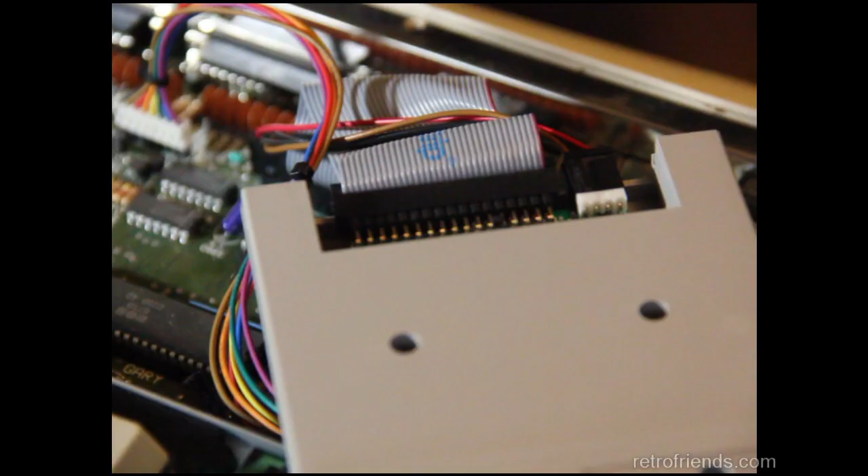Hello. In the first two videos of this series I showed you how to set up a Gotek Floppy Emulator for the Amiga and added some hardware modifications. In this video I will show you how I made a custom Amiga 500 mount that simulates a floppy disk.

Here you can see how it operates. The thumb drive goes into the eject buttonhole, which also ejects the disk. I fitted an OLED screen and navigation buttons into the disk itself.

If you only wanted to see the end product, you can stop this video shortly. The rest of this video is how I designed this end product. Anyone not interested in such things may find the rest of this video boring.

Anyway, I got the idea to do this mount from Thingiverse, a site for freely exchanging 3D printer object files. Let's check that out first, since it's where I started. Okay, so here on Thingiverse we have the original object by Ashes Man. Props to him for coming up with this idea in the first place.

There are a couple of improvements or changes I'm going to make to this design. This is for the 1200. He says it can be adapted for the 500. I basically started from scratch. The only object I downloaded was the disk object, and that was just to look at it, just to see sort of what he did, but I knew I was going to change it. And what I wound up doing is recreating the whole thing from scratch.

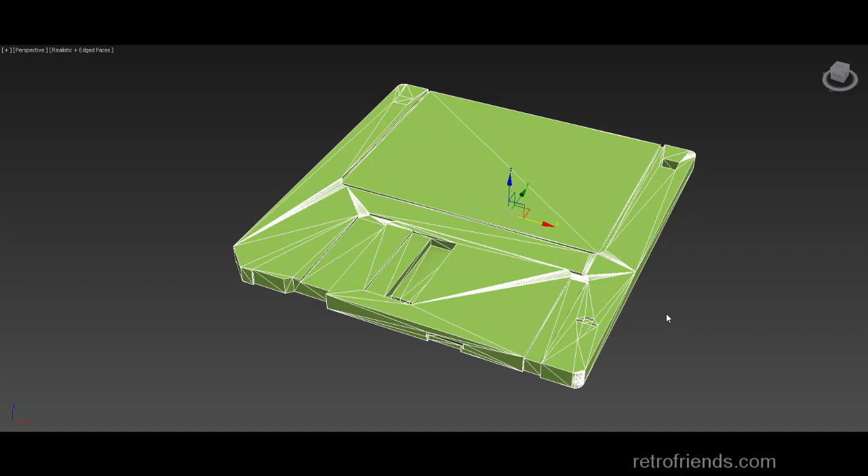Okay, so here we have the original object imported into my 3D program, and a couple of things about the design that I noticed were this part of the disk, the disk door that slides open and closed, and this arrow here. Everything basically from this point out to this point is never visible from the outside because the disk only slides out 2/3 of the way or whatever. So I just didn't see the point of having that in my design.

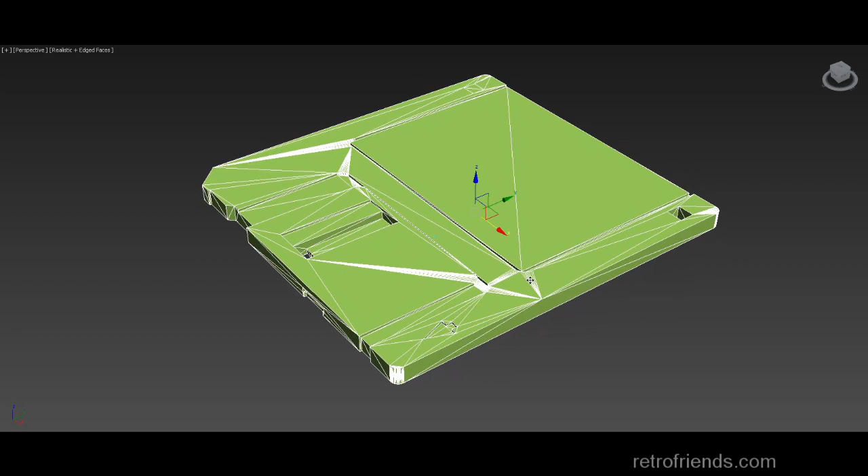Another thing is he created this in order to simulate the larger edges. The edges of the disk here are thicker on an original disk than this center part here where you put the label. It's a slightly recessed or stepped down area. His solution was to create a channel that goes over and around.

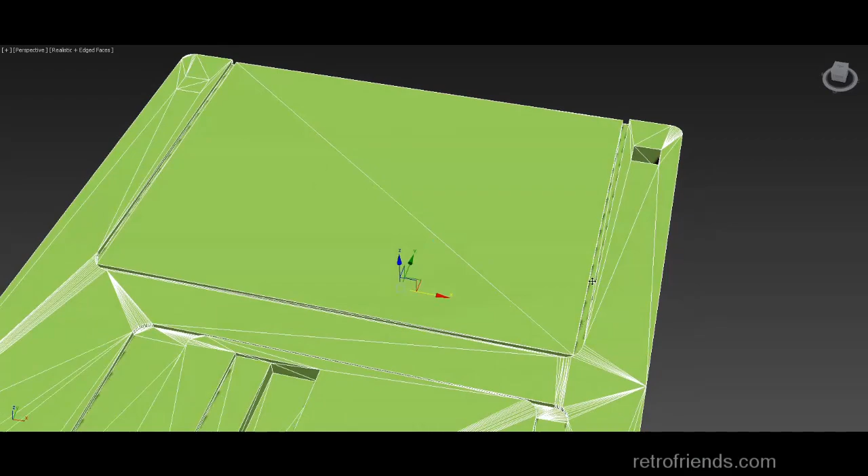His design here doesn't have any openings on the top. He assumes that you're going to print this out and then he has it very, very thin in the areas where you need to cut it out. You can almost punch it out, I guess. But I mean, you do that and you're going to have to finish it off somehow.

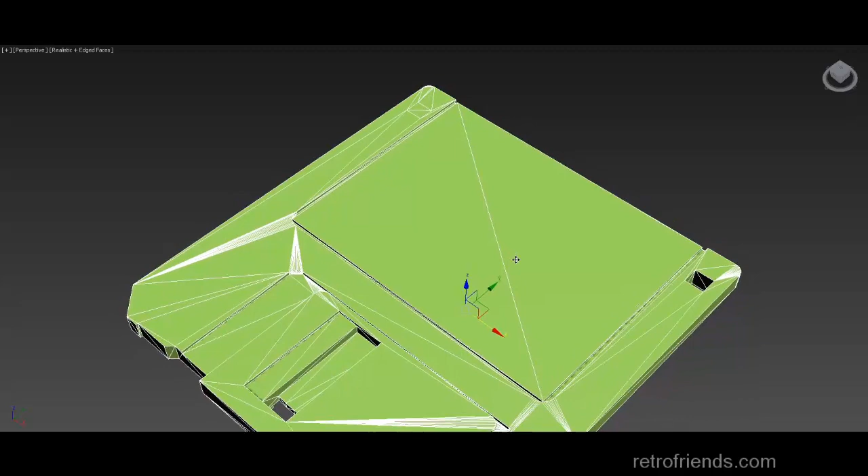So my design, I treat all of this differently. I'm not saying that he's wrong in what he's doing. I just have a different way of doing things. I plan to have a base object, and then this is actually going to be a separate object that I print that I'll simply glue to the top of the other one to create that stepping effect.

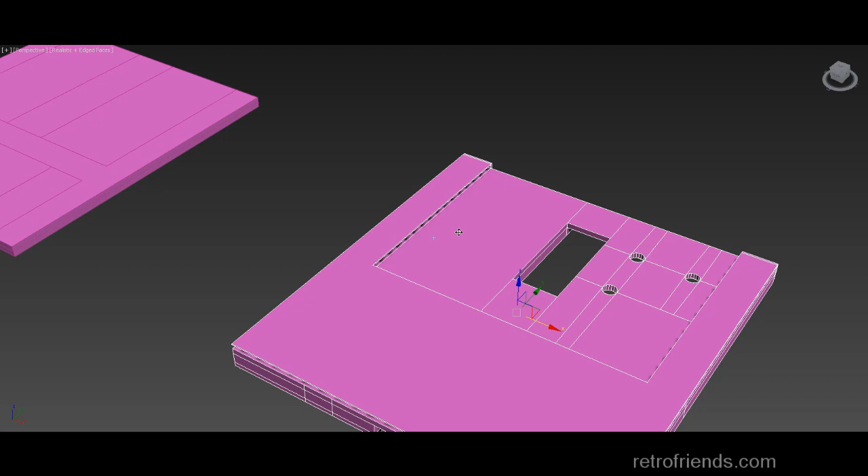Because of the detail that's required underneath, you have to print this upside down in order to get the details right. Yeah, because we're going to have some steps here, and obviously this is all going to be messed up if you don't print it correctly.

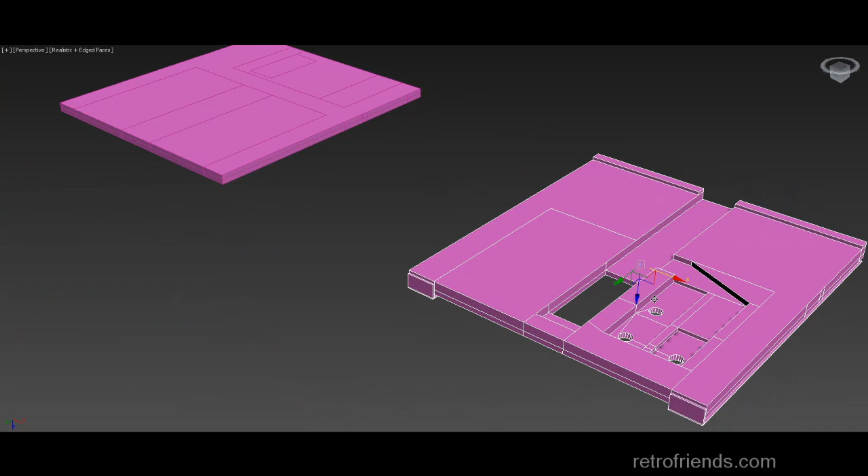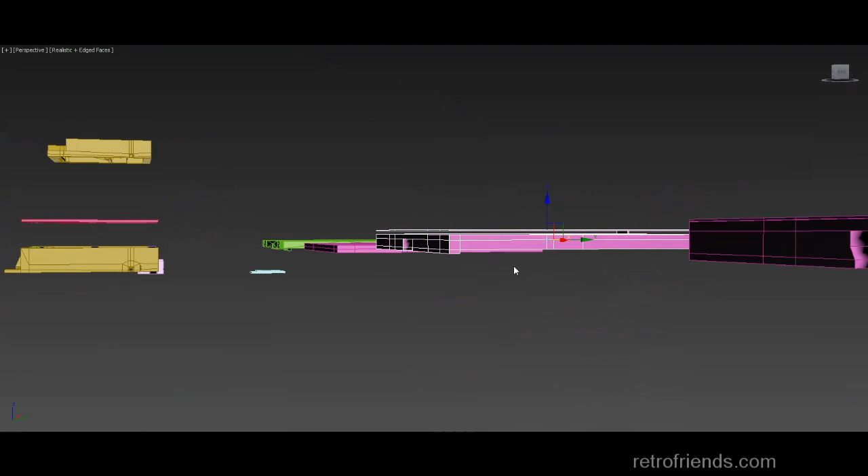So this copies his original design in the fact that he has a channel cut into his object for wiring the buttons, and I guess you would assume that you'd want to glue this stuff in, otherwise I don't see how it would stay. I think in this particular case I was checking out the ability to create this second piece that's on top.

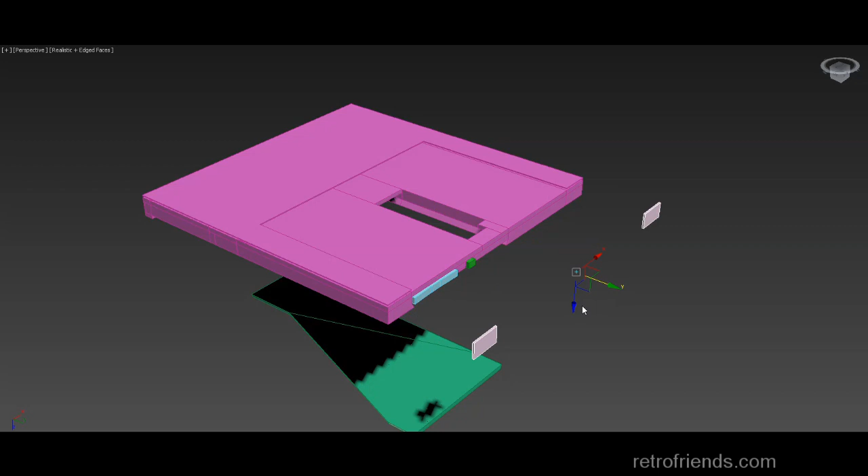So here's my final product. Here's my top piece, and the top piece has two separate pieces that you print, because obviously when you print something like this you can print it upside down, and these will print, except they're not going to come out very well, especially when it's only like a millimeter thick. It's going to come out kind of inaccurate.

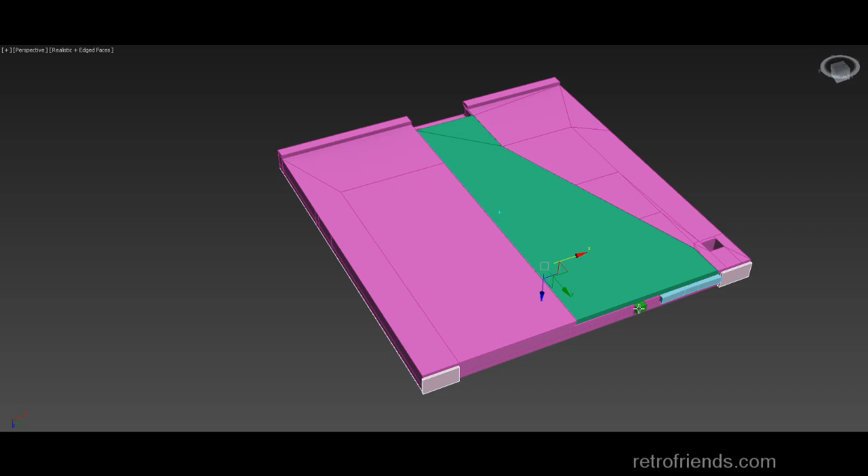You're going to get some oozing and whatnot, and it's just not going to look right. So I print these as two separate objects on the printer face down so that they come out really well. And here's the big change I did. The buttons, I created a rocker switch for scrolling up and down, and the eject button is right next to it. And then the display is kind of in the same place.

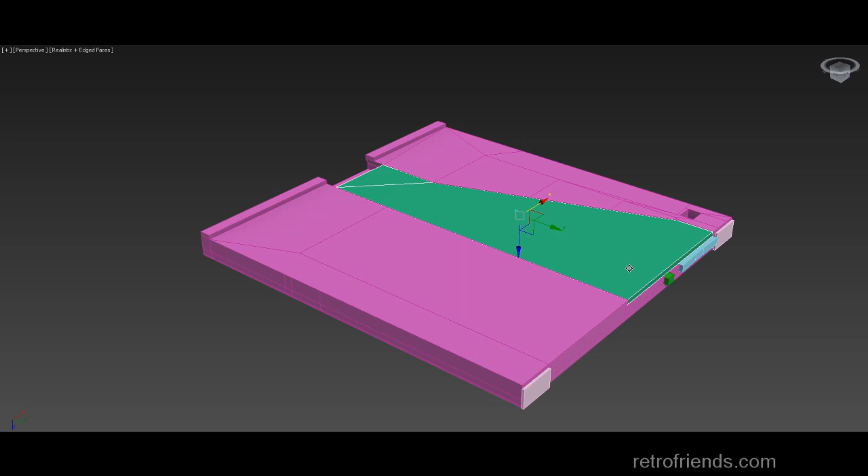So let me just show you how this, plus I have this cover, and this cover worked out extremely well, better than I could have expected. I designed it to perhaps glue in, perhaps screw in, but then I discovered that there's no way I would get usable screws of the right size that would go flush, because this is only a few millimeters thick.

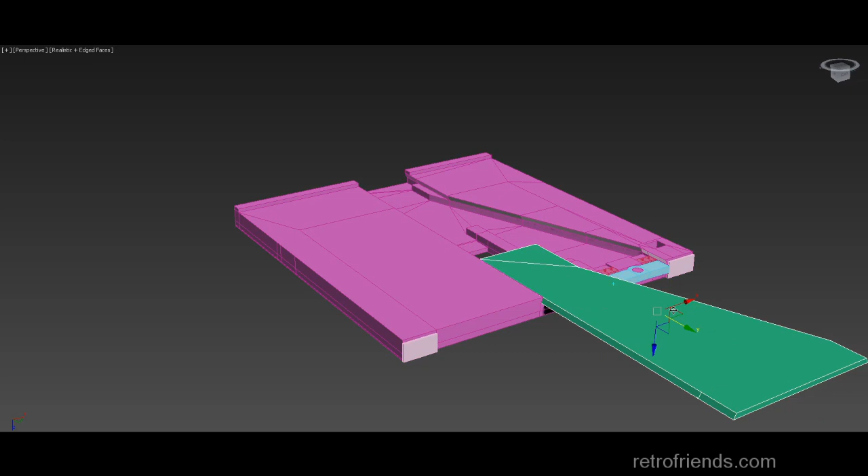So I created an angle on this object and on the main object so that this thing would actually slide in by itself and just sort of lock itself in. And it really worked very well. So this is the way you would print these objects. This one like this and this one like this.

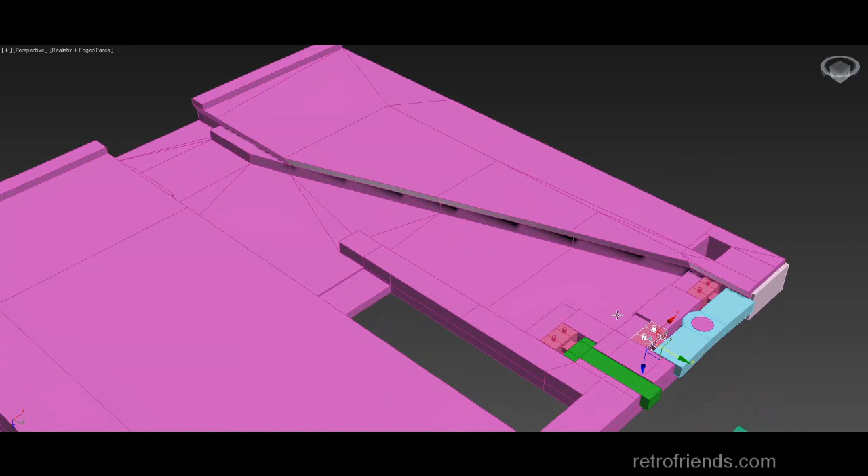And here are some, I modeled some switches, some momentary switches. These are available on Amazon or wherever. They're pretty much the smallest switches you can get. And they're somewhat SMD type. I mean, the contacts on these aren't these posts. They're like right here, and yeah, they're basically SMD type. They're very tiny. So I plan to use tiny wires anyway, and I'm not going to put any strain on them.

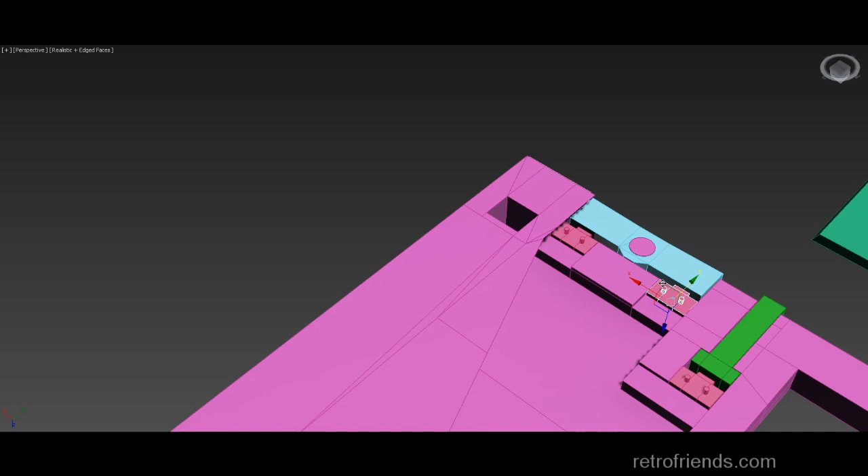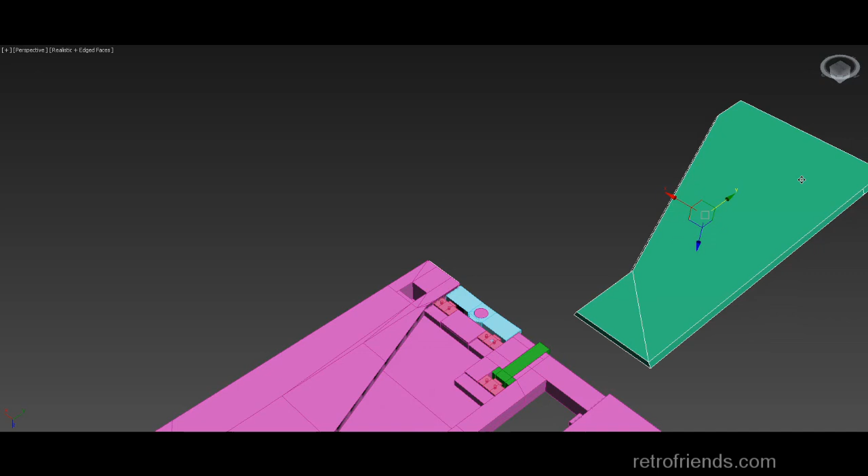So these cylindrical things on top are posts that these switches come with, assumedly to hold them in place in a circuit board or whatever to go through. I wind up chopping these off so that this slides over nicely. Originally I had created this with holes for those and a hole for this, and I raised this middle post up and created a hole for it. But I found that it was very difficult to get this thing on. It's just not wide enough to have much flexibility, and it became unnecessary.

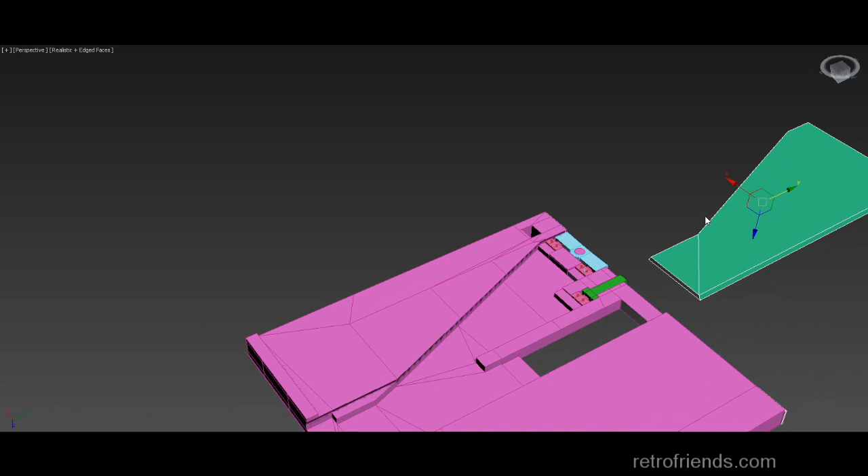When this thing slid in, it fits snugly because of the surface area here and down here, and there's quite a bit of surface tension to hold this in. And obviously the further or tighter you push this into the chassis, the tighter it will be. It creates its own tightness, plus in addition to having this angle on here. I created this rocker switch assembly. It's just a simple piece of plastic that fits over this post.

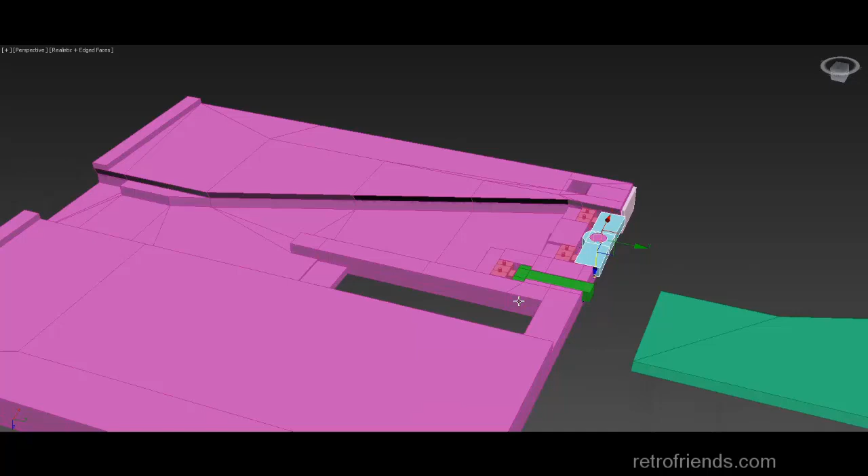So the eject switch also just has a mechanical linkage to the outside to press on, that sticks out farther than the switch would itself. These switches all fit very snugly into this base, and with the lid on, it doesn't move anywhere. So you actually don't have to glue any of this stuff in here, which was my intention.

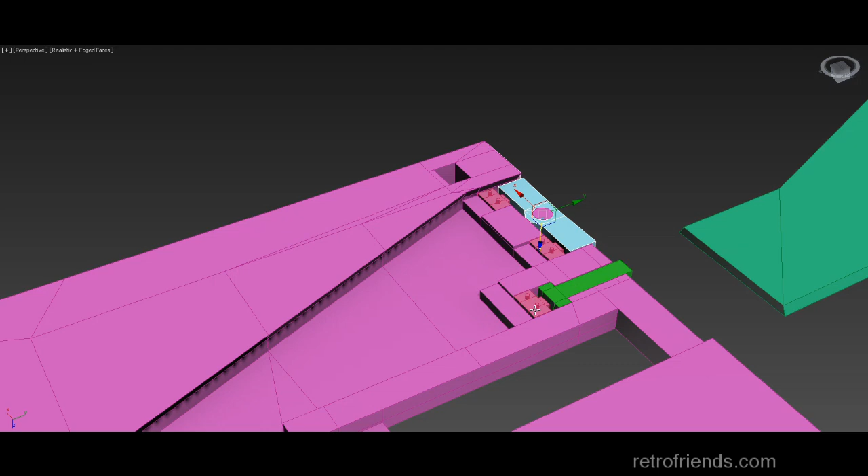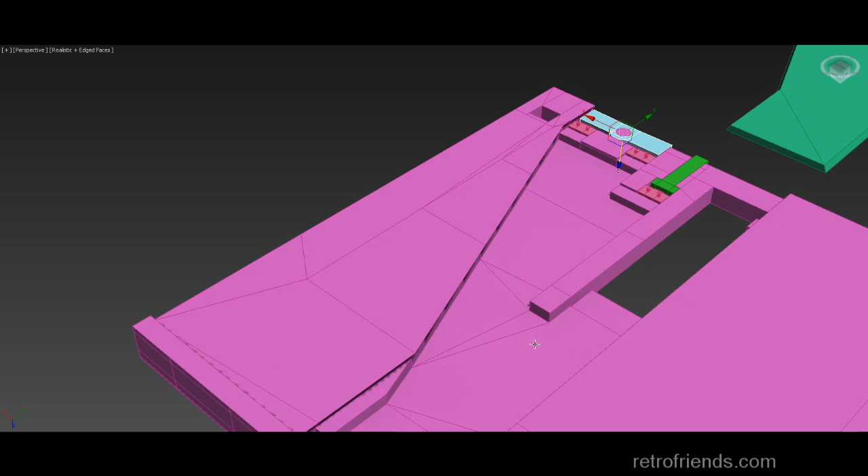One thing that I will point out is that these areas are stepped down for the wires to pass through, because these higher areas are flush with this piece. So the wires get attached to these, and they exit out the back here and come through here and join up with the wires from the OLED screen. Now the OLED screen, this is just a matter of getting the dimensions really close, and that also precludes having to glue it in.

There's a ribbon cable. I'm kind of frustrated at the design of the OLED screen, because I thought you could just close this area off or just create a hole just big enough for the actual glass of the screen. But on this side of the OLED screen, there's a ribbon cable that seems to be flush with the front of the glass, and it comes off the screen, so you have to account for it. You can't put any material here because the ribbon cable needs to come out, and it kind of loops around and attaches to the circuit board.

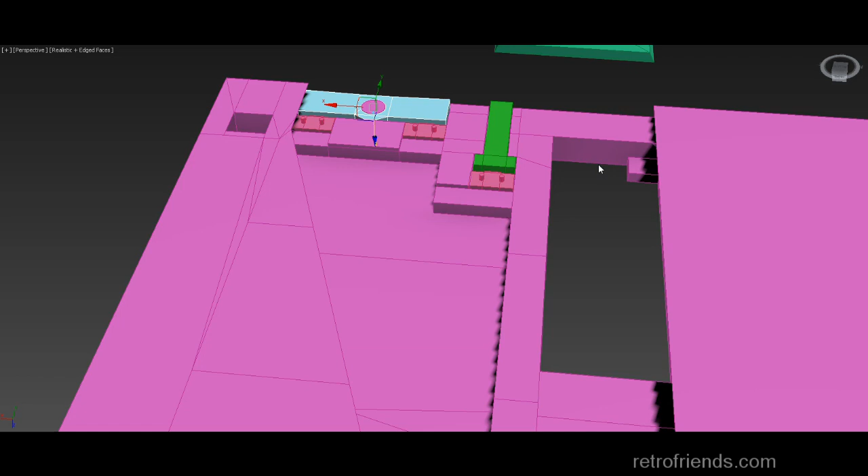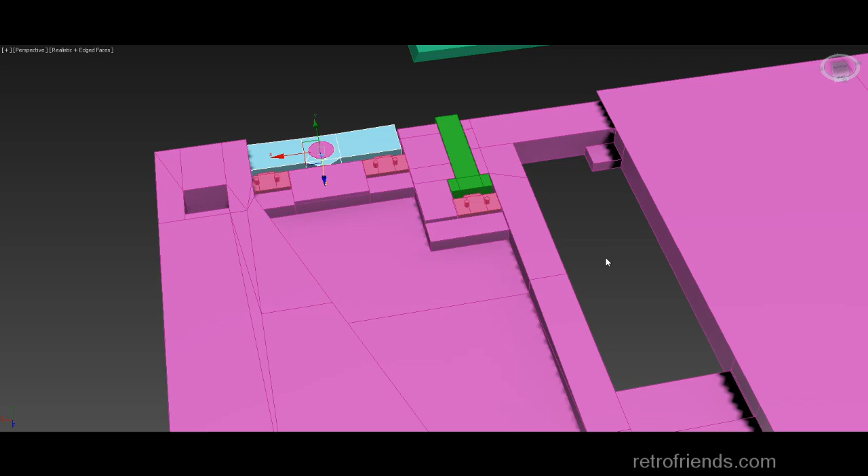The ribbon cable itself doesn't go the full width of the unit, so I was able to make a little piece of plastic here to keep the OLED screen from just simply falling or being pushed into up above the object, if I can speak right. And again, this design seems to have worked pretty well. I'm satisfied with the result. I didn't have huge expectations for it, but it exceeded my non-huge expectations.

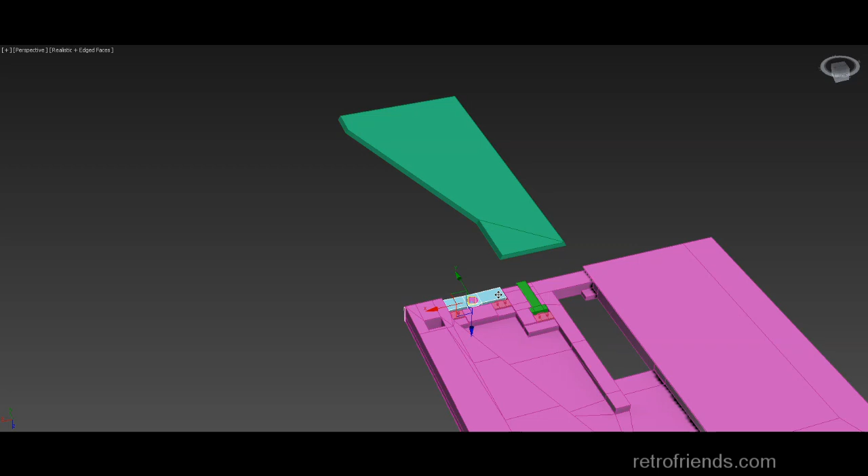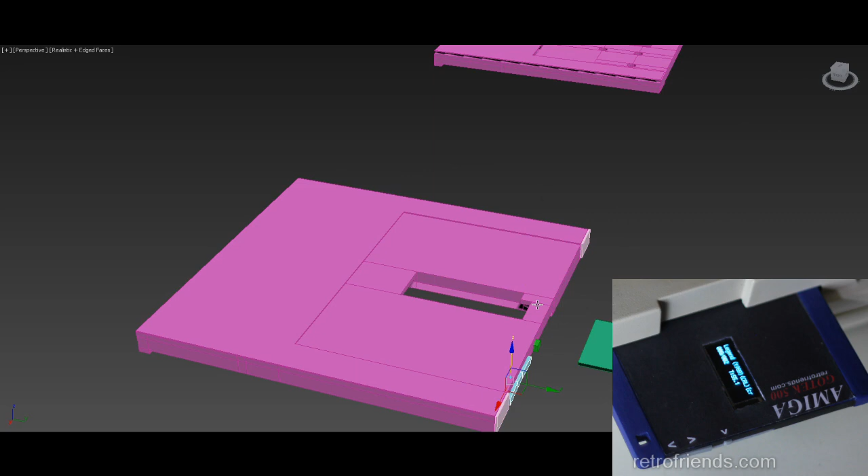However, some of the materials I'm working with or some of the techniques are basic. And I think the part that I'm most unsatisfied with is I made a label that fits over this area. I just have sticker paper and an inkjet printer to create the labels. The label extends around this hole, and I also printed it in black so that the OLED screen would sort of blend in a little more. And it comes across this area, so that you don't see this edge here, this corner.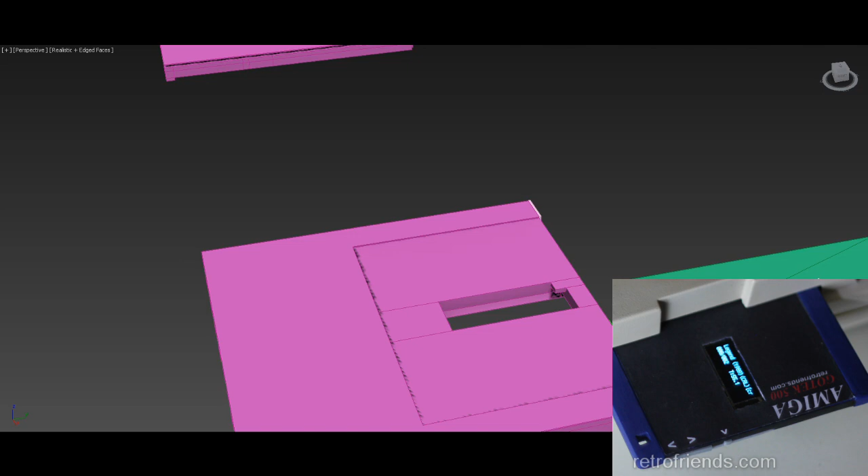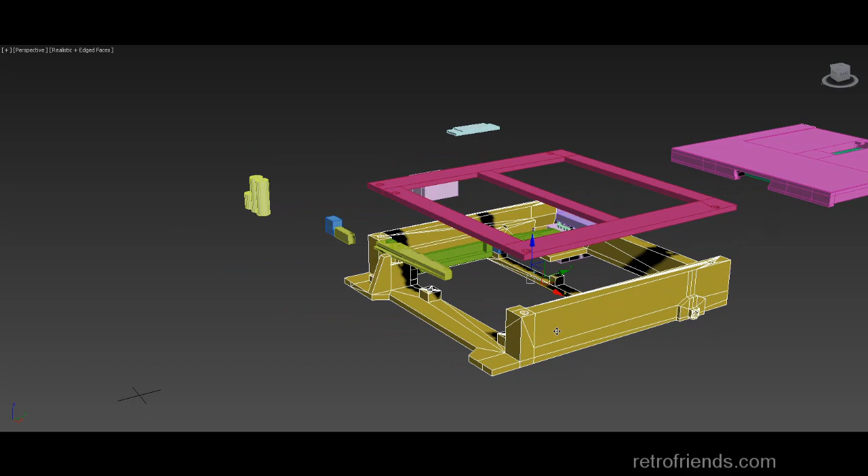Okay, so once having created the disk object, then comes the time to create a holder for it, for the Amiga 500. And obviously it starts with creating something dimensionally that will fit into the Amiga 500 and have the disk line up with the original disk hole.

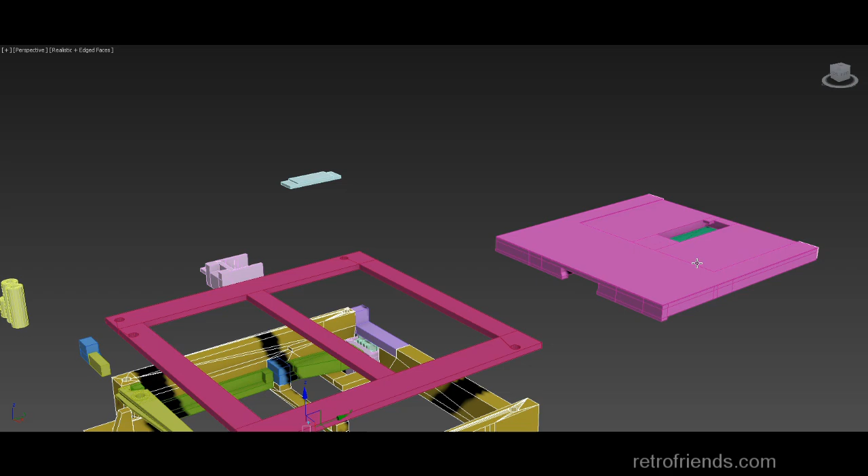One luxury that we have here is that the disk slot in the side of the Amiga 500 is way larger, about twice as large maybe, as a normal disk. So I need to take advantage of that. I need all the thickness that I can of this. So this is thicker than a floppy disk to give me room to put stuff in.

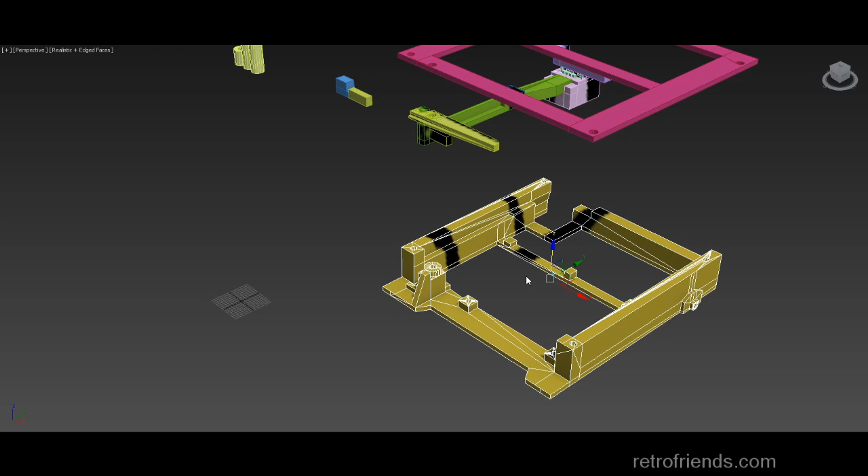So we create a mount that is very basic. It didn't have any of this detail. I was obviously just creating something that I knew would fit into the 500 and that I could continue to design around it so that I could put it into the Amiga 500 and test fit it and make sure the disk comes in and out and make some adjustments on the height.

And obviously the way this is printed, you wouldn't print the standoffs together with it. You wouldn't have it part of this object. So standoffs are a separate object, and simply just glue them. There's 3 posts in an Amiga 500, 1 here and 2 back here, vertical posts, and then the 4th corner is held on a lateral screw and screw mount. So getting all those holes to line up and be perfect was key.

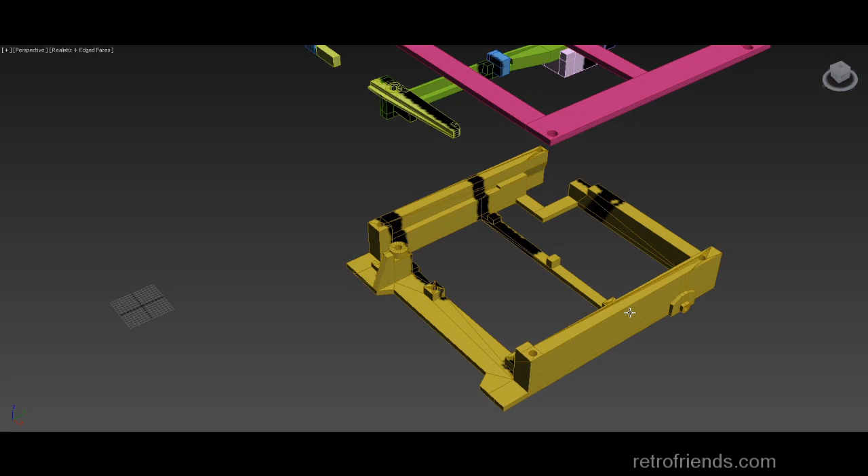Once I had that object done, I created mounts. That's annoying. I created mounts for the Gotek PCB so that it would fit in here, and I found out that the best way to do that was to turn the Gotek upside down so that the larger through-hole components were sticking down into the empty space below for clearance purposes.

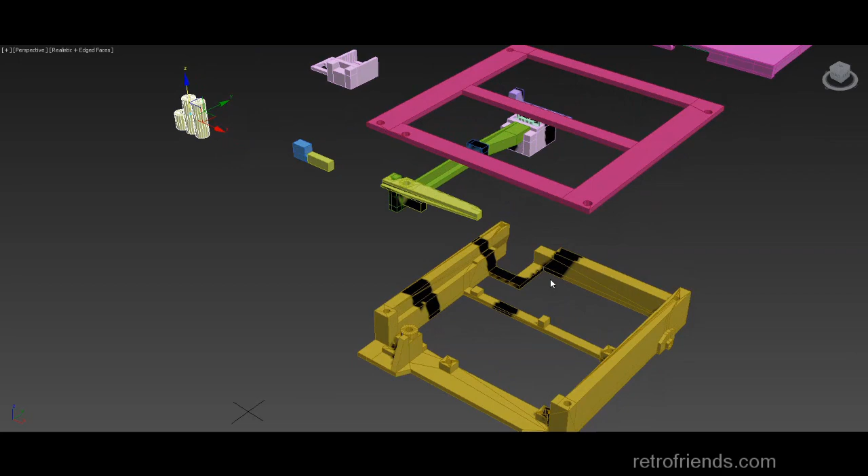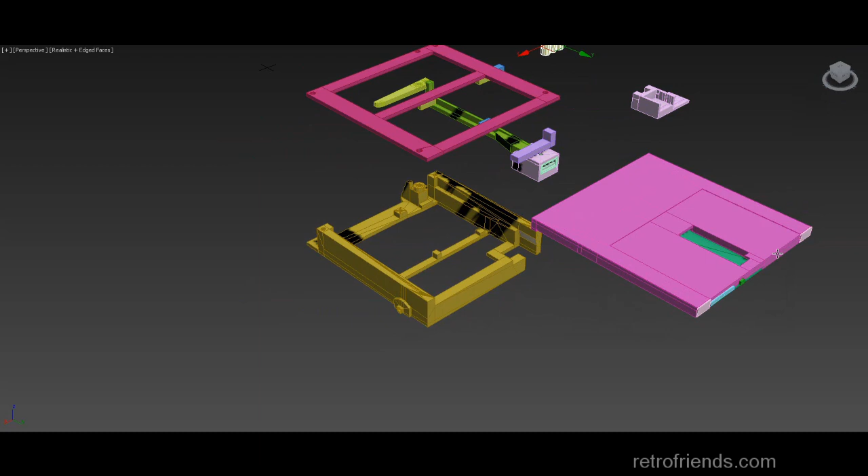I was thinking about what I would do with the eject hole in the Amiga 500 case. The previous guy had simply created a place for you to plug the USB drive into. That seemed like a really good idea. I couldn't really come up with any other place to plug the USB drive other than maybe the front of this, but then there's just not enough room. It's not thick enough.

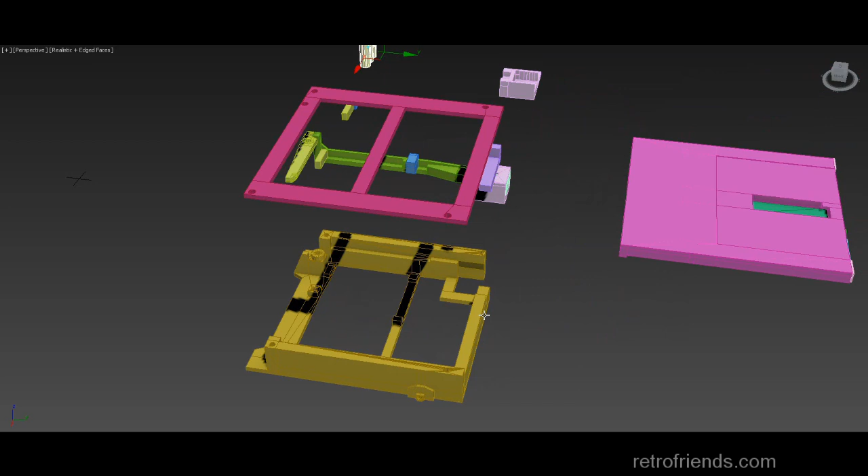So I pretty much resigned myself to the fact I wanted the eject button to be a functional eject button. I really didn't see how, with that other person's design, you were going to actually grab the disc and pull it out. I would assume that I guess the disc sticks out enough so that you can grab it with your hands. But you know, when an Amiga disc is inside the Amiga, it doesn't stick out at all.

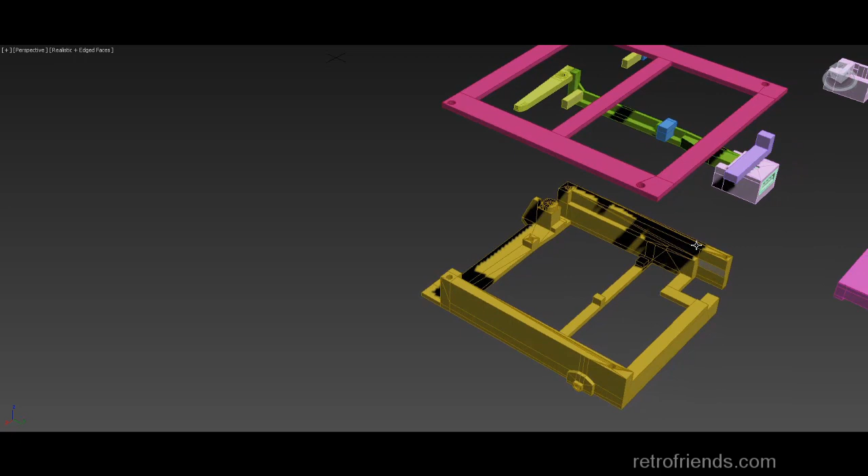And I thought, well, it would be really good if I could make some sort of eject mechanism with a simple lever. But also, what am I going to do? I'm going to also have to make it the USB thumb drive socket. So I did both. The problem with that is obviously when you're plugging a thumb drive in, it's going to eject the disk. But I was thinking to myself, when do you want to plug a thumb drive in? And would it be a big deal if when you plugged the thumb drive in, it would eject the disk? And I thought to myself, well, not really. It's not a big deal.

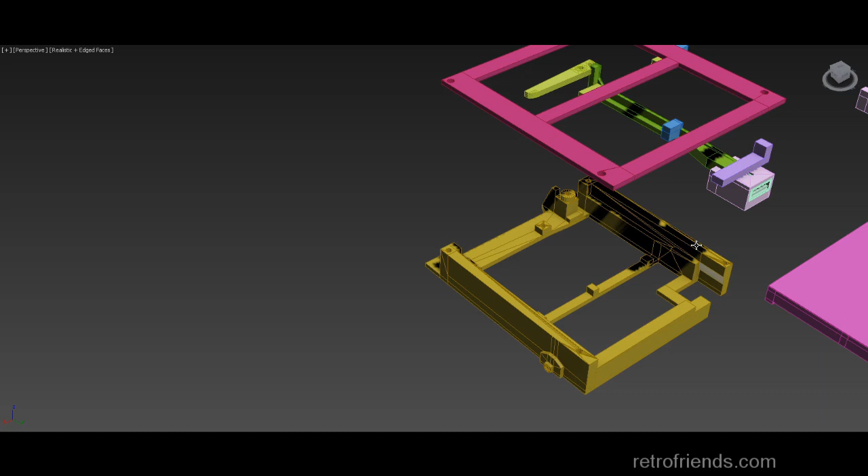And then pulling the thumb drive out, that's not going to do anything because just like the Amiga, it's not a two-way lever. It's just a push lever. You can't pull it out. You simply reverse the mechanics by pushing the disk in. So that is the same design I've come up with.

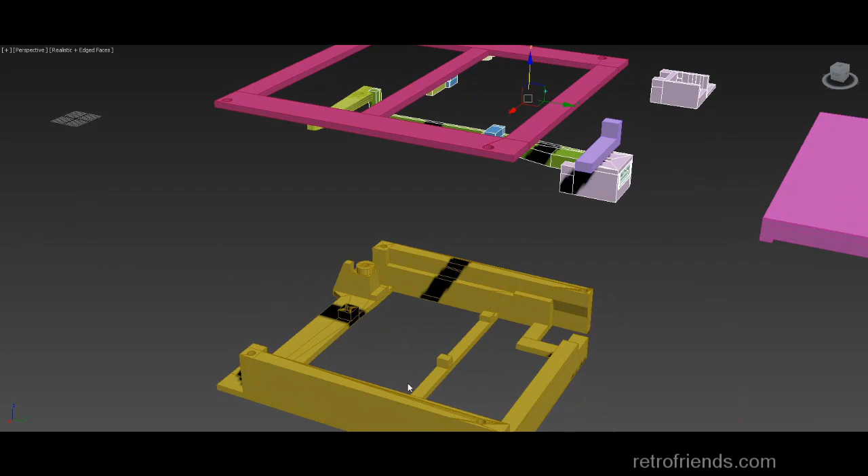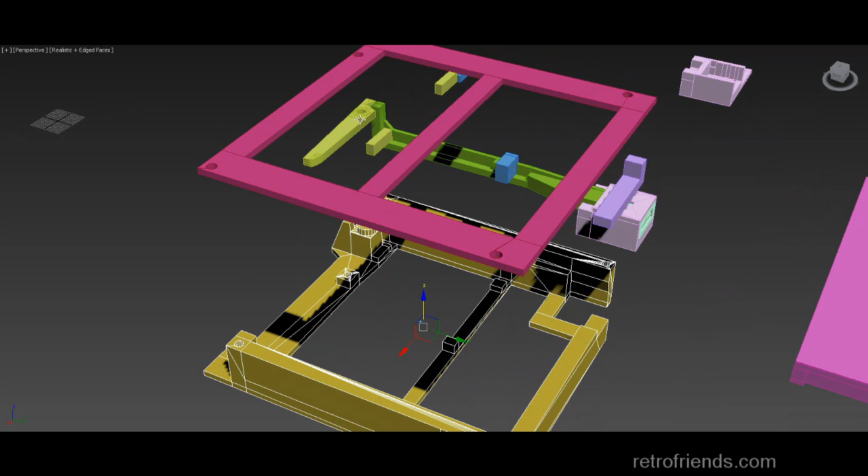So this assembly right here, with the exception of this piece right here, I'll explain that in a minute, but this assembly right here is the ejection system. And obviously you can see, well, let me just bring this object back up. So I had to create a cutout. I simply desoldered the USB socket out of the Gotek and mounted it in a piece of plastic here. And then that plastic is glued to a lever that pushes on a pivoting lever and simply ejects the system.

I can actually demonstrate this somewhat because when I'm designing something like this, I'll put the origin of the object right in the center of the hole so that I kind of know how it's working. So it gets pushed and it simply ejects. So you push the lever this way, this gets pushed that way and ejects the disc.

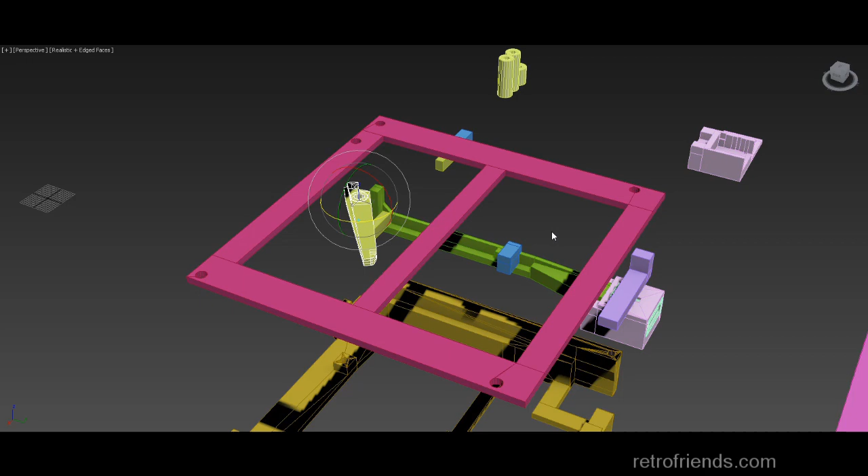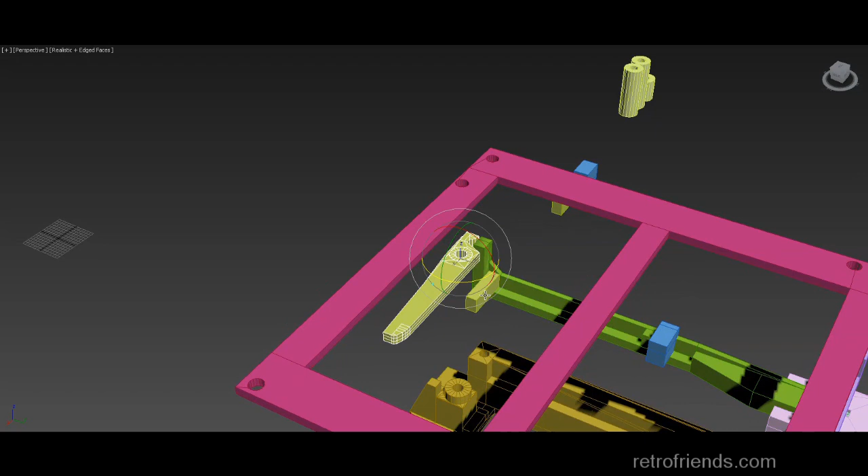And this is made fairly thick, as thick as I could go on this piece, because it's going to take a lot of strain, especially in this area. And I also created somewhat of a bolster in the back to have even more strength. And then I have some stops that I printed separately, a stop here and a stop here. These are the separate objects here, and those get printed separately.

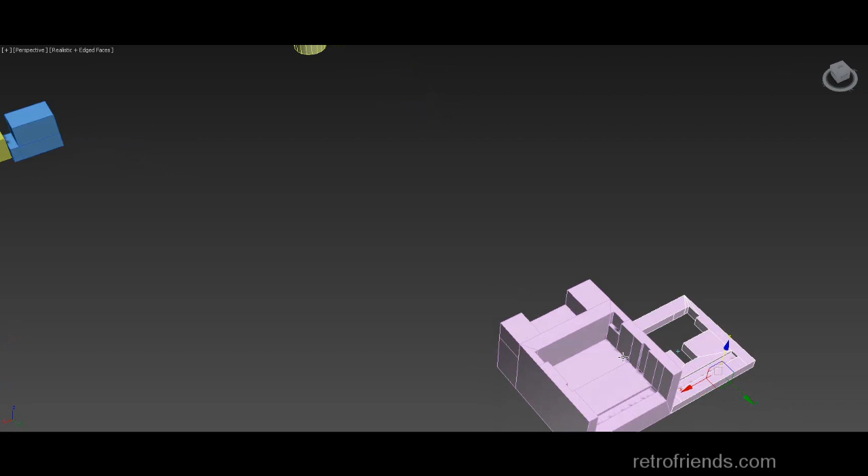So obviously you create an object to fit the thumb drive socket, the USB socket, into. This is the top spun around, and there's channels cut into it. And this was actually fairly complicated because the USB socket in the Gotek has quite a few different planes of surface on the thing. So I finally got that done. And then I simply created a nice surface area for it to be glued onto on the lever. So this is quite a bit of surface area to have glue applied to. Plus this area needs to be super thick.

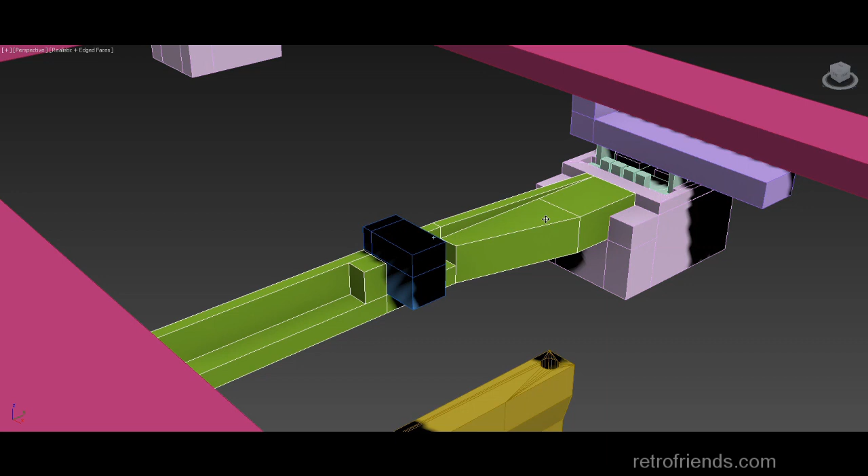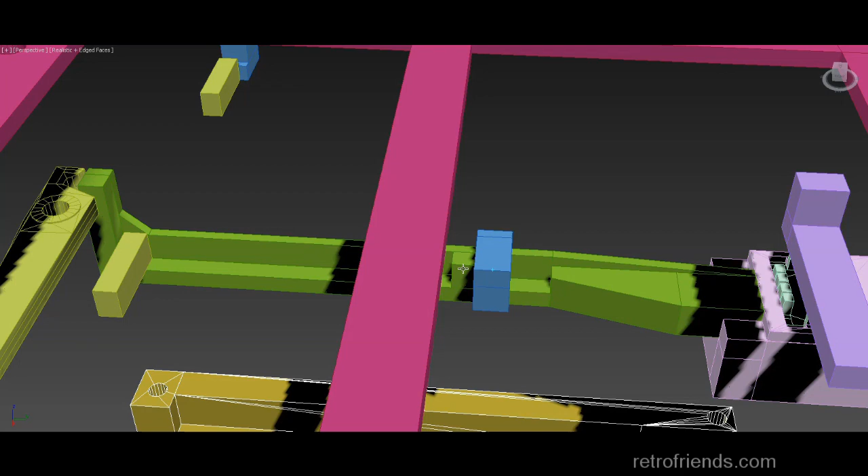From this point over to this point, there could be a lot of strain, sideways strain or whatever, from plugging a thumb drive in. You want this to be as thick as possible, but then when it comes to actually getting into the portion where there's only one force being applied, a pushing and a pulling, you don't need it to be as thick. And so I just simply knew that I was going to cut a channel so that this thing would have an easy way of me just locking it in by simply gluing this piece and this piece to the base, and then creating a stop here for pulling out and a stop here for pushing in, and that's basically it.

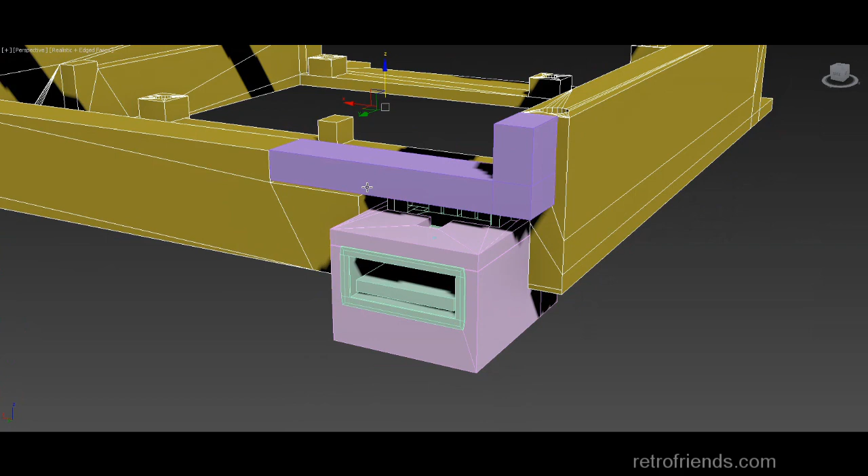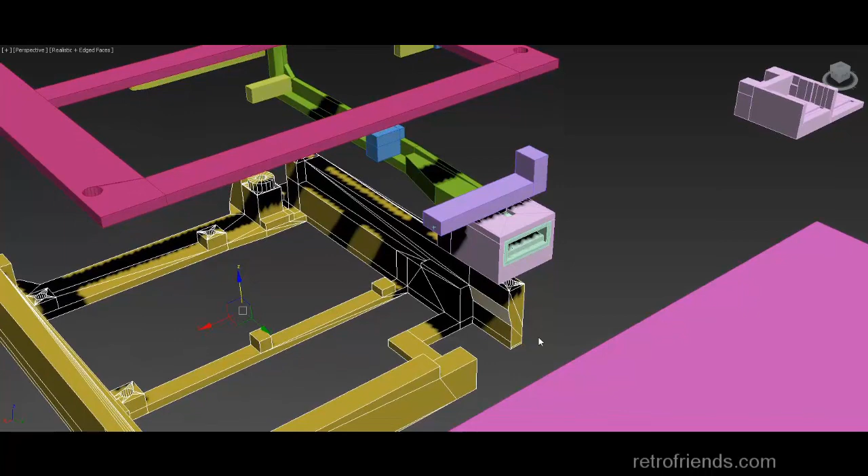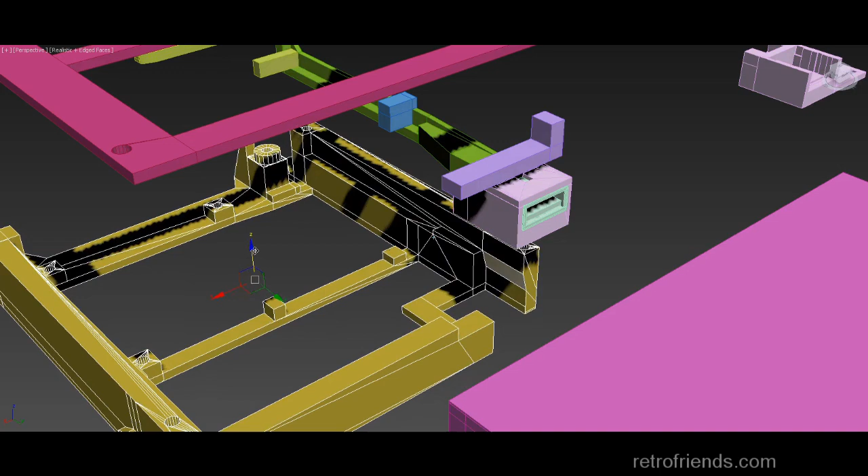And I'll explain that top piece right now. So obviously on additive manufacturing you cannot print very well over an open space, so I simply just chopped this area out of the design and created a piece that you can glue onto the front. So I just kind of wanted to reinforce this area. I of course reinforced it through the back. This creates a more stable object for printing anyway, to hold things down, to create more surface area with the print platform. But I also wanted to make it have more strength, especially around this eject button.

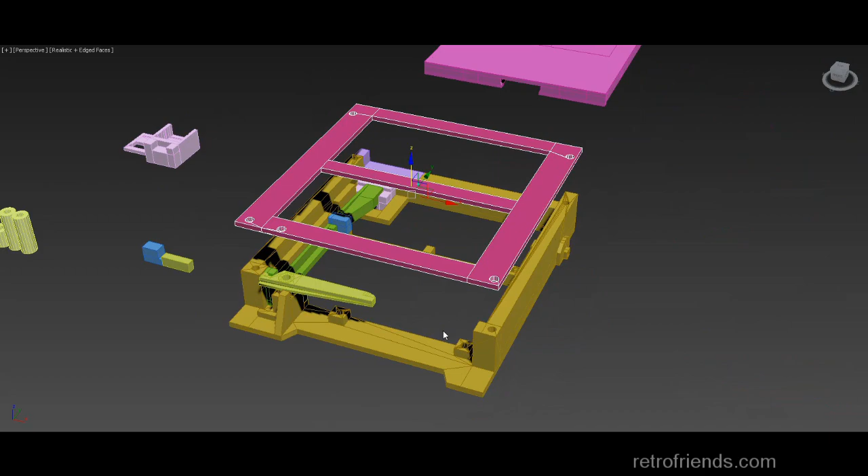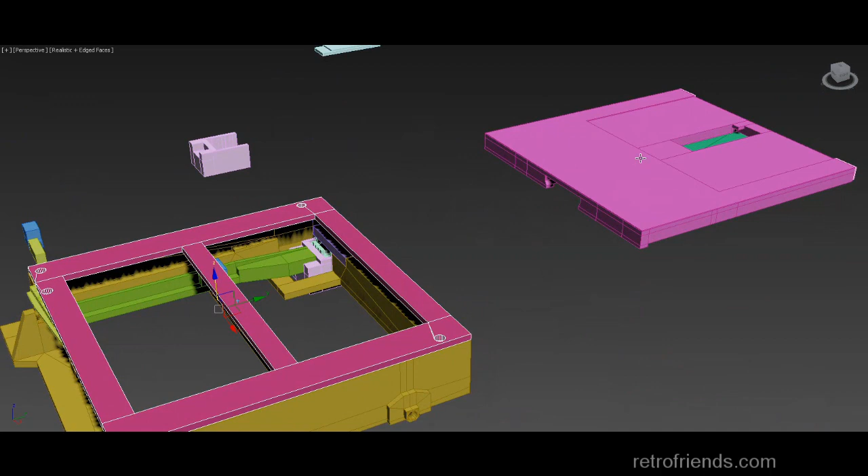Oh, then of course we have a top piece. And the top piece, this is for servicing purposes or modification or future whatever, or even to just get the Gotek motherboard out, because it's screwed down and its screws are below this. To create a top piece that is removable was absolutely crucial. So we have screw holes, and I don't know if it's M3 maybe, or number 4 screws or something like that. Basically I design things around the hardware that I have, and usually 3mm holes. I usually have hardware for that.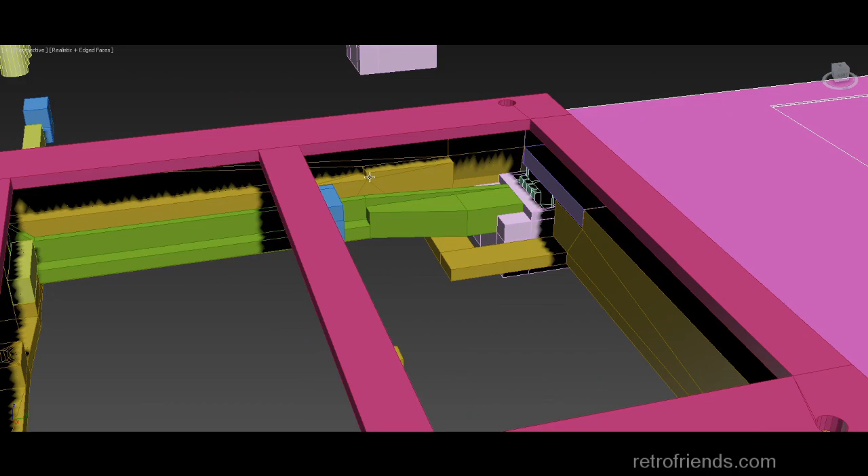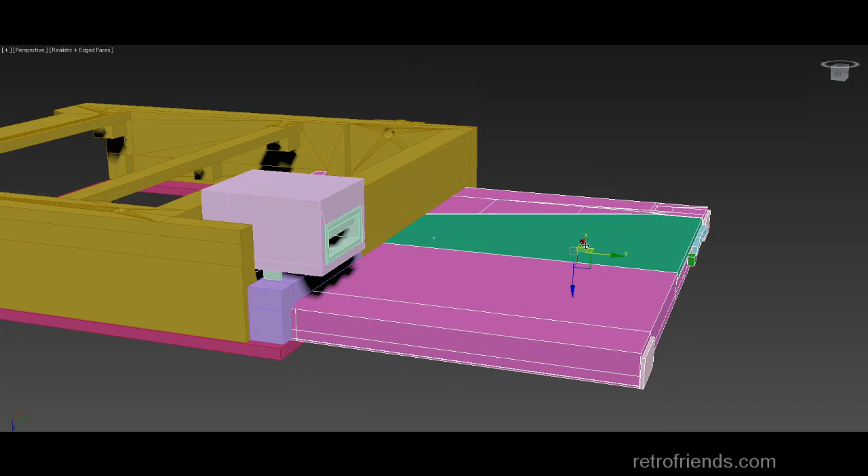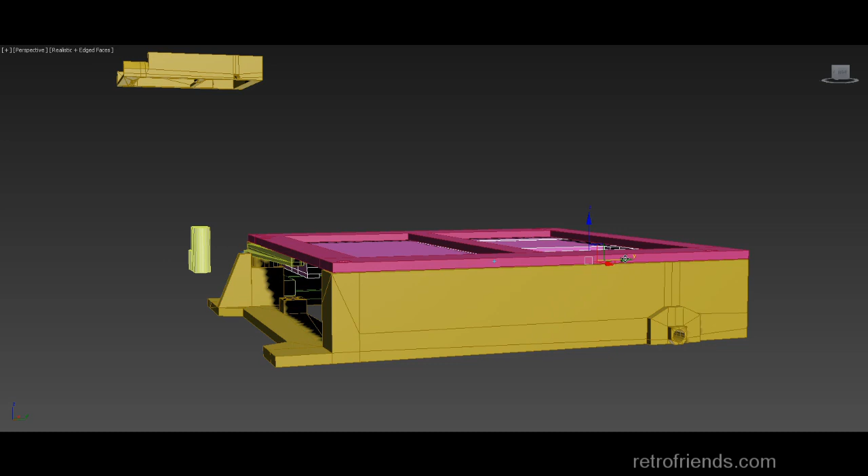So let's just demonstrate how this works. Let's line it up. And of course, like the other design, I do have a step here to stop the disk from coming out any farther, and its mate in the frame is here. And I didn't bother with any detail around here because it's not visible at any time when using it. Let's just line this up here. You can see the limit about right there. I think we need to come down, or up, as it were. Yeah, that's good enough. Okay. So here we have the disk ejected, and we will put it in here. We just have to stop it roughly up against this lever here. Something like that. Yeah, right, there it is.

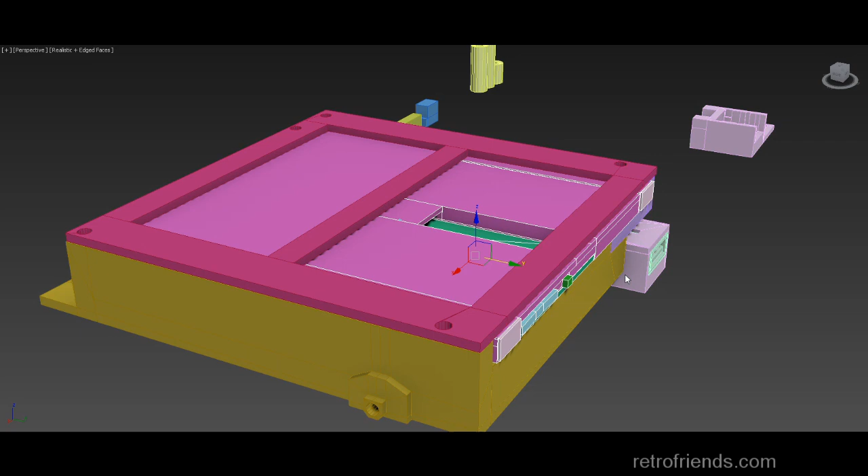Okay, so pressing on the USB port, this actually doesn't come out of the case, so it actually requires a USB thumb drive in order to eject. But the unit itself is non-functional without a USB thumb drive anyway. And the only other design issue is the type of USB thumb drive that you're going to be using. You would have to use a slim USB thumb drive. I got a Samsung one that I bought a while ago that was nice and slim. Thumb drives come in every shape and form, so just simply getting one that has a narrow design that will fit through the Amiga's eject button hole is all that's required.

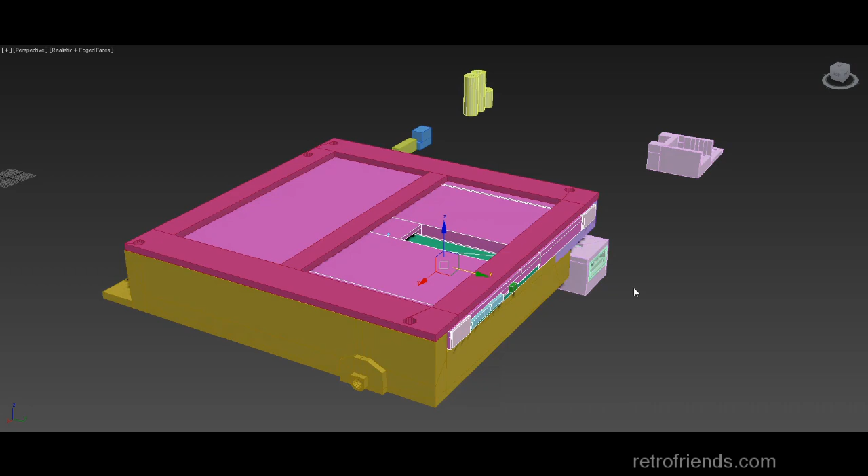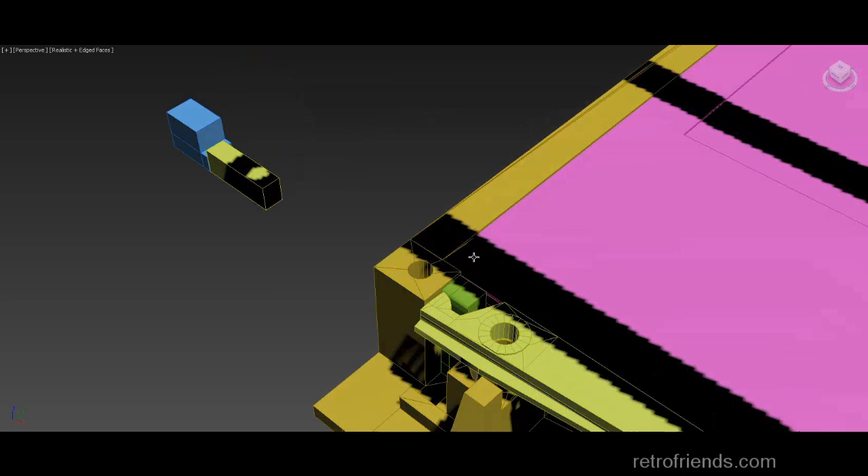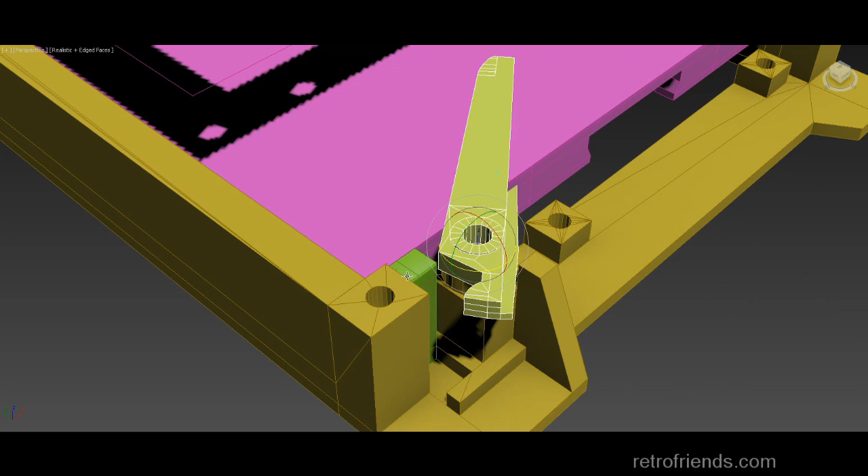So pushing on this with a thumb drive in it will bring this lever back. It will pivot this lever here, and I actually have a limit. Let me just take this top off for a second. This thing has a limiter. Basically this piece of plastic right here acts as a limiter as far as limiting the rotation of this. So let's just see how far this goes. Right about there. And that corresponds to how far this lever will go before it hits its stop.

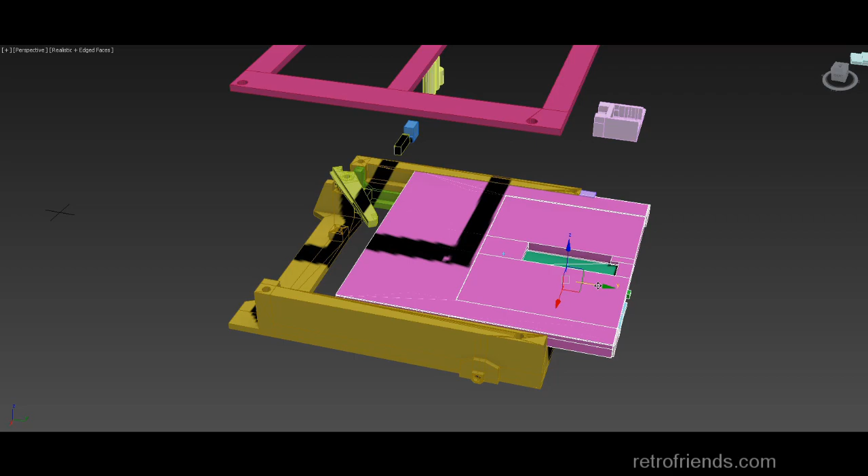So here we have the drive, and we will see how far it gets pushed out when the lever is activated. And that is how far the disk comes out. It comes out probably a little less than a normal disk would, but you can certainly grab it at this point and pull it out the rest of the way until it hits the stop. And then you can easily read the display from a normal seating position and use the buttons to go up and down and eject. So that's basically all I have to show you on this. I just thought I'd show you the finished product before it goes into the Amiga.

I printed most of it in gray, and then I had another project, so I had black in the printer already, so I printed an unimportant, non-visible part in black, but I suppose you could do the whole thing in black. I printed the floppy in gray. Good neutral color for something that you're going to paint, and obviously what I did is I painted it blue, and then put a black label on it to sort of blend in with the display.

But I did spray it with clear spray, glossy, but we're just dealing with regular sticker paper, so using some sort of plastic-based sticker paper would work better. Anyway, you can see that I printed the label in the orientation that a disc normally would have. That's another way I differed from the original design. He just printed it in the way you would read it, but I thought it would look more disc-like if you put it the way a disc would be oriented. And I just called it the Amiga Gotek 500, and then there's my website underneath it.

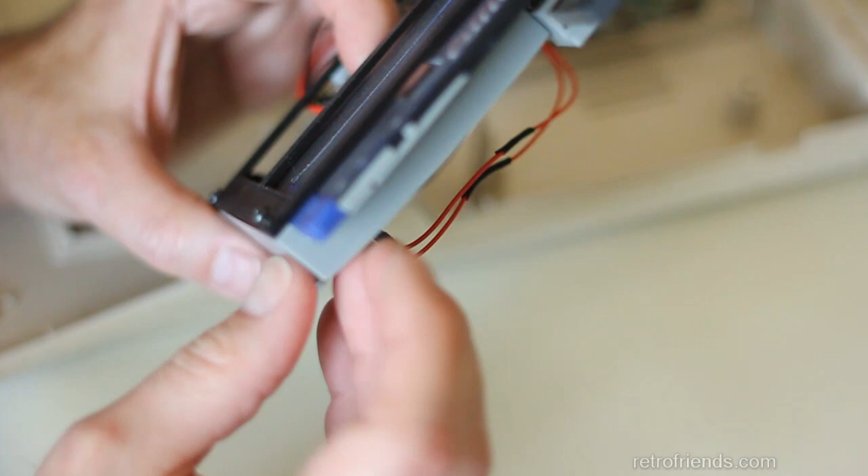This is all a separate piece. This part here and all of this part here and this part here are a separate piece, as well as the two pieces on the end here, to create that extra step that a drive would have. But this is raw plastic, and that's what you want. You want raw plastic against raw plastic. You don't want to have any paint on there, because paint obviously rubs off. It does some interesting things that you don't want it to do.

So raw plastic against raw plastic, and a nice wide surface of, I think it was at least 15 millimeters or something, so that it can grab and hold it in there until it's ready to be ejected.

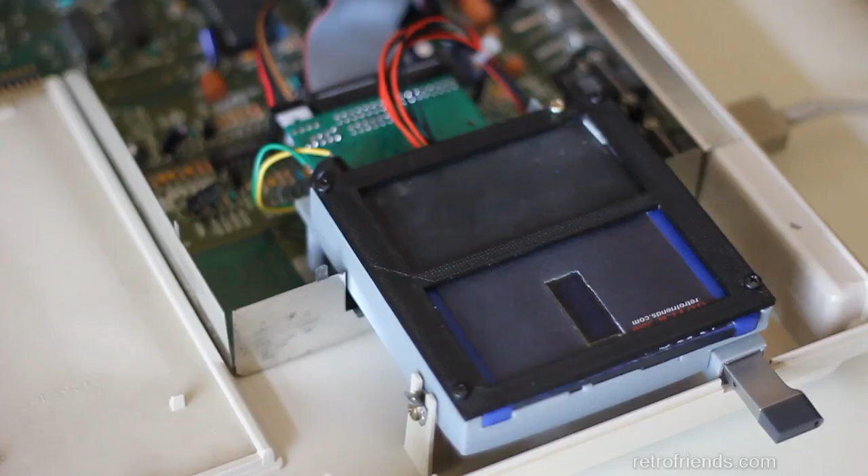Okay, so here it is installed in the Amiga, and now these posts, I guess I could make a note of these posts for you. These posts were printed separately, not at the same time. They were different objects, and they were glued to this chassis. Obviously the way you want to do this is to screw the post into the base of the Amiga, and then take the drive and place it on there and glue them one at a time, actually.

So I put all three posts in, then I applied glue to one post, put the Amiga drive in where it should, lined it up here, that helped to line it up, and made sure that I was squared up within the case. And then I repeated the process with the other two hole posts, which are under here and under here.

I went ahead and took my own advice and put a zip tie on here. The placement of the zip tie is probably pretty crucial. There's some leeway in the case. The only thing that might cause a problem is this cover, but I think we're good. We clear that EMI shield, whatever you call it.

So if we push the thumb drive, we see we have an ejection, and obviously there's nothing that holds it in this way. I could design another friction-based stop here so that it stays solid, but I don't believe it's going to help with selecting the buttons. Let's see, so right there. So here we have the buttons. I sort of envision a person holding on to the disc with two fingers and then going up and down like that.

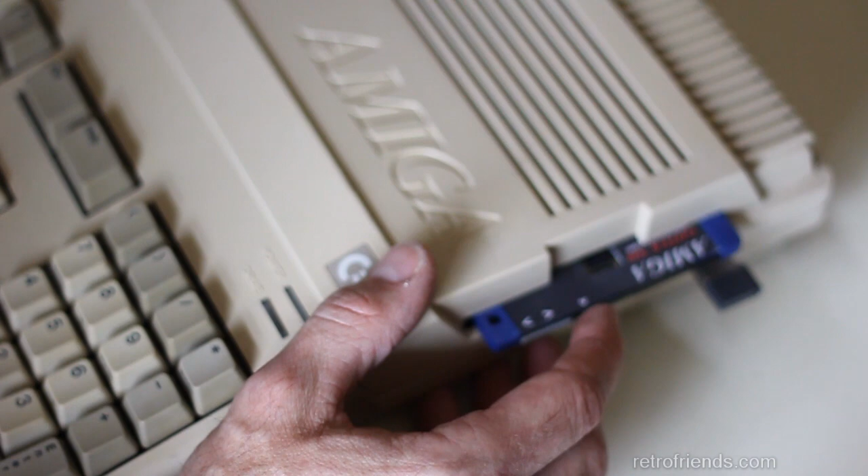This Amiga 500 case is actually a little bit busted. I fixed it, and then a friendly neighborhood cat, well, actually household cat, decided to run through the area where the keys are, where there's a space, and rebroke it.

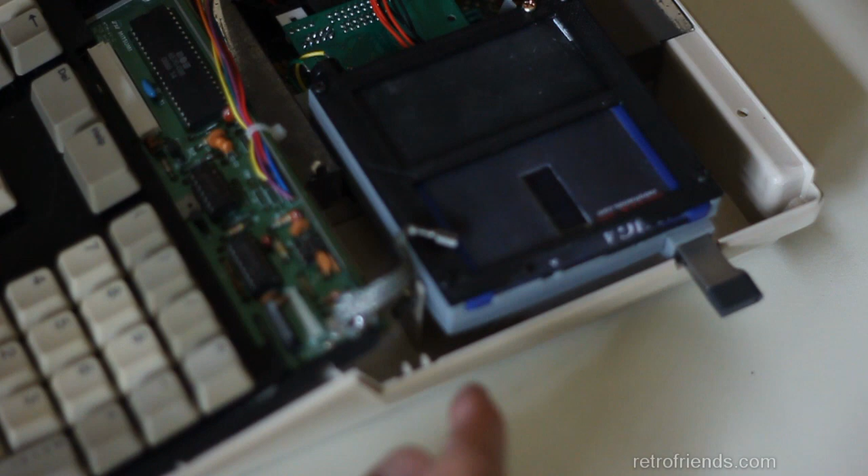Anyway, so we have this in here. Let's focus right on my finger here on the thumb drive. Okay. All right, so we can see that this is acceptable. Another way to make an adjustment on this is right here where we have that one lateral screw down here. It's not bottomed out in its mount at all. It's raised up just a slight bit to make it fit properly.

This ground strap, I'm hoping it's for EMI purposes because the drive is plastic and there's no reason to secure it down to it. And the screw here is just a piece of metal. It's a metal screw into a plastic hole, so I can only get it so tight. But anyway, so that's that.

Let's just do a final demonstration here. Make sure we're good. Yeah. Let's have this ejected. God, these things are tight. I'm hoping that I have enough reinforcement in there so that the receiving end of this thumb drive is strong enough to take it. I did do as much bolstering as I thought I could given the amount of space.

So turn the computer on. We got that clicking noise. Then we're going to go ahead and put the drive in there. I'm pretty satisfied with the result. This will probably be the picture that I use. Let me take a picture actually. Yeah. Okay. Anyway, that's how I did it. I hope this is useful to you.